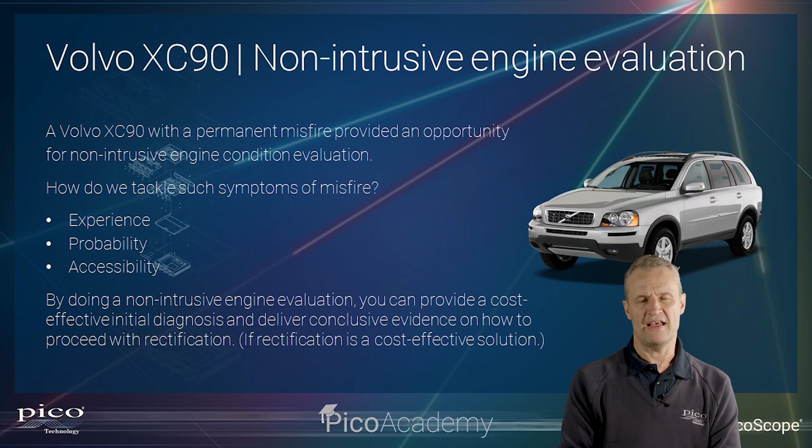So we have to check the condition of the 12-volt battery. We want to spin this engine to carry out a relative compression test. And you'll see here in these test results, on this occasion, the battery failed. So before we even start, we've got a repair bill of at least £100+ to replace the battery. Now, that may or may not influence the customer's decision, and as we go on, we'll see why.

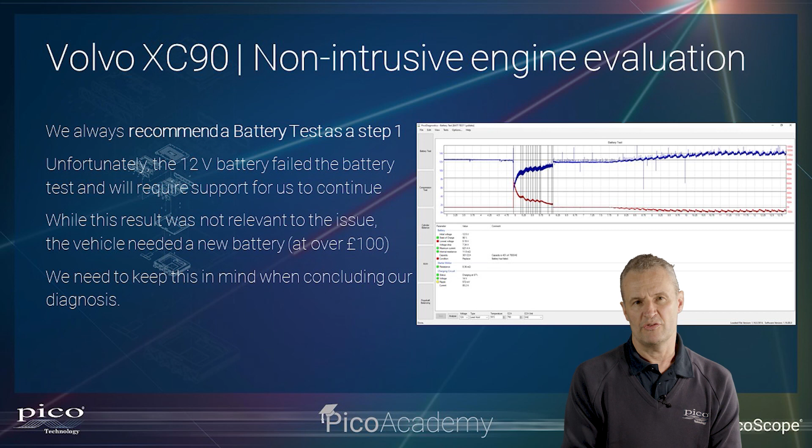Think about, let's say, if it's a spark plug that's the cause of the misfire - that's fairly straightforward, and I think a customer would probably go for that and a new battery. But however, when it comes to an engine that requires dismantling, all the labour that's involved there, plus another £100 for a battery, it all starts to pile up. It's the fact that we can hand all this information back to the customer without any nasty surprises at the end of a repair or during the repair process.

So in the data here, we can see that our battery has failed on capacity. The capacity entered was 750 cold cranking amps, and we achieved 40% of that. So in this scenario, we're going to have to support this battery to continue with a relative compression test.

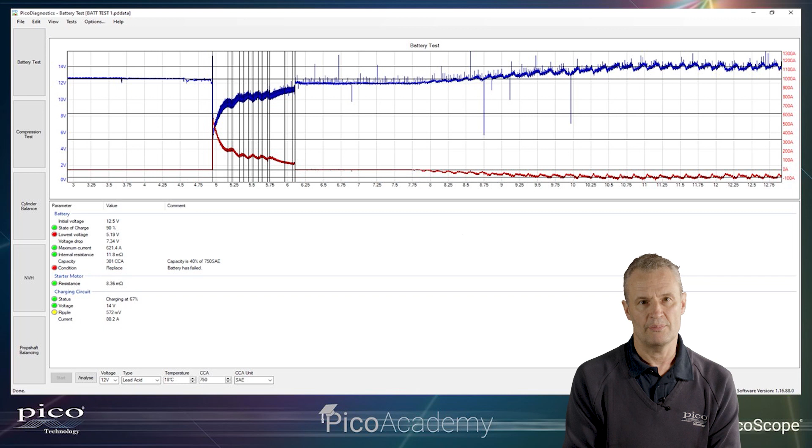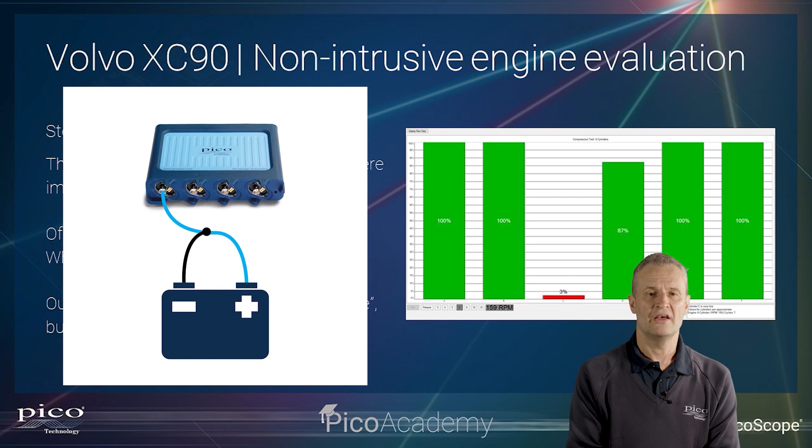And here we are. This is possibly the most straightforward test that we have in the Pico Diagnostics suite, probably PicoScope as well, for that matter. It's no more than connecting a test lead across the battery connected to channel A, disconnecting or preventing the engine from starting, cranking the engine with a foot on the gas pedal, so the gas pedal is right down, throttle is wide open, and these results speak for themselves.

Let's just have a look there. We've got a cylinder down. Clearly, it looks like we have no compression at all on one cylinder. Remember, it's a relative compression test, so we're comparing the worst performing cylinder with the best performing cylinder.

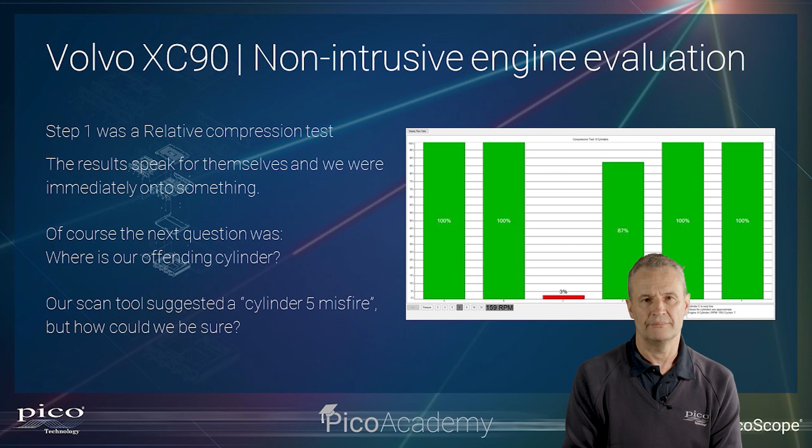Now, we found a cylinder that's down, but how do we know it's cylinder 5? It's at this point that we have to switch to PicoScope, and that's what we do here. So for this test, we incorporate a synchronization signal. What is that? Well, you'll see here on channel A, we've got battery voltage. On channel B, we've got battery current.

And on channel C, we've got the ignition event, what we call the PCM trigger signal, to the ignition coil pack cylinder 1. Now, we can also use the coil on plug probe as well - it's whichever is easier. I certainly like using the PCM trigger signal because we have a hands-free signal there. We don't have to hold the coil on plug probe or tape it in position. We've got a good connection.

Right, based on the firing order, which on this was a 6-cylinder, it's 1-5-3-6-2-4. We're going to have a look at, well, see if we can confirm if cylinder 5 is our offender. So let's have a closer look.

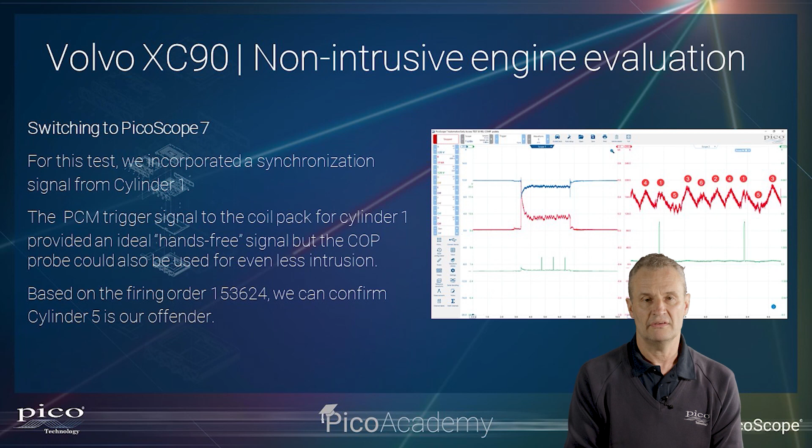So here on the left is the zoomed out or the full image, and on the right hand side, we have zoomed in and we have hidden channel A. So what we've got now is channel B against channel C. Now look at the alignment on channel C - it aligns with a peak that we know is a compression peak. It's a high current ramp from cylinder 1.

Following the firing order, look what happens to current flow into the starter motor as we go on to the next cylinder, cylinder 5, completely low. We then get a recovery back onto 3, so we know 3 is okay. Looking at 6, it's lower, but still much higher than 5.

2 and 4 are pretty much the same. 1 looks like it's slightly lower, but as we drop down onto the next cylinder, our current drops down considerably. Cylinder 5 is definitely our offender.

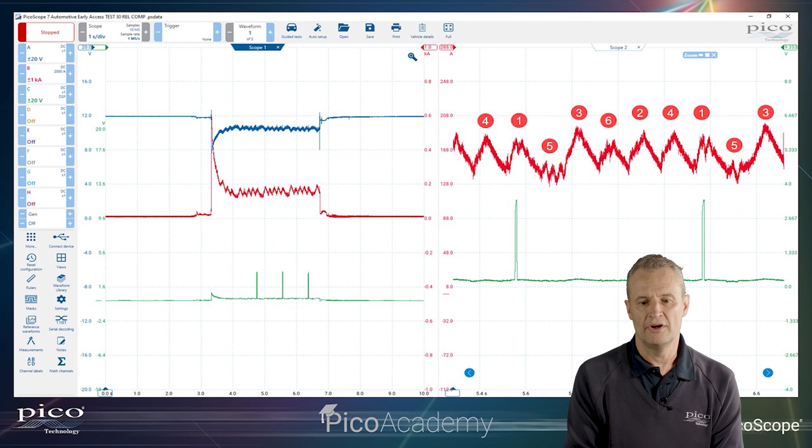What this is telling us is that the effort on the starter motor is minimal to compress cylinder 5, for whatever reason that may be. That's represented here by low current flow during cylinder 5's compression stroke. So let's move on.

We'll stay with the non-intrusive engine evaluation theme, keeping everything as non-intrusive as possible. Here we're going to look at exhaust gas pulsations. This is a real neat test where we place either the pressure transducer or a first look sensor into the exhaust tailpipe. Remember to secure it, because we don't want any pulsations that we can attribute to movement.

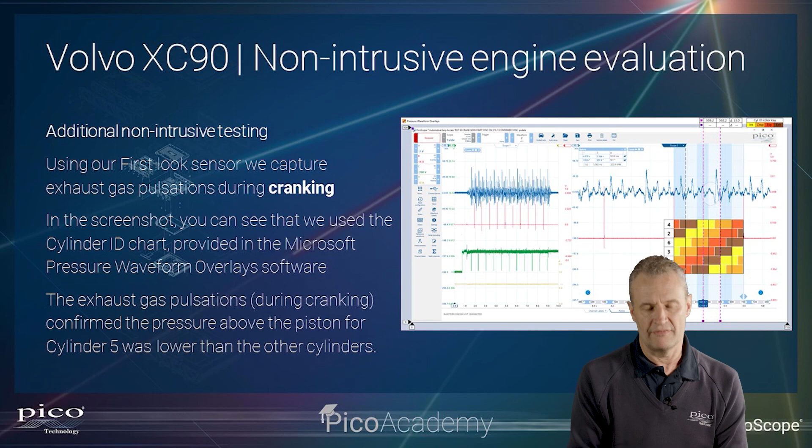What an overlay chart does is enable us to determine what events are taking place in the 4-stroke cycle on every cylinder, at any given point in time within our graph. So let's have a look.

Once again, on the left we've got the zoomed out view, and on the right we are zoomed in. We've kept our synchronization signal, this is channel B, and this is the red waveform. We know that that is the firing event for cylinder 1.

Moving up the chart, the next firing event in the firing order is cylinder 5, and that's what we want to focus on here. So I've added two magenta vertical lines, which are part of the pressure waveform overlay software, and we can see the exhaust stroke for cylinder 5 between the two magenta dotted lines.

Focus on the pulsations we can see in the exhaust — I've highlighted the area of interest with a blue circle. We can see there that we have an additional pull. This is a push or a pull back into the exhaust when cylinder 5 is on its exhaust stroke.

They call this the dollar bill test, where you traditionally place a dollar bill against the tailpipe of a vehicle, and when there was a misfire, momentarily it would pull the dollar bill back and seal the tailpipe. So why is that happening? Why is there a suction in the exhaust during the exhaust stroke of cylinder 5?

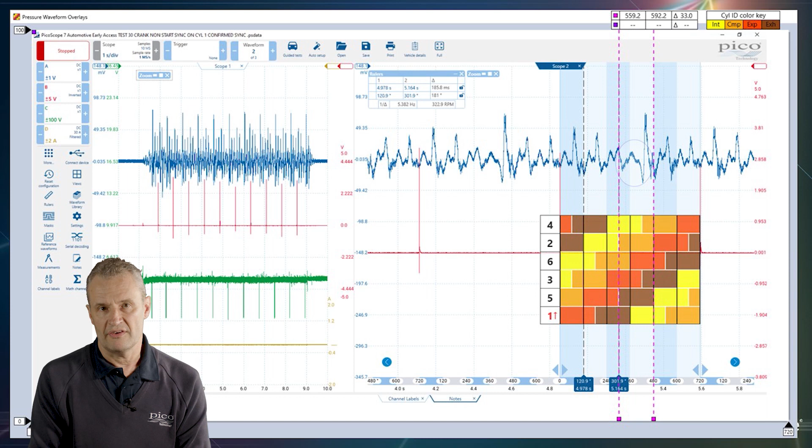Okay, so let's move on. We're gathering evidence as we go. We know we've got cylinder 5 compression down, and we know that when cylinder 5 opens its exhaust valve, there is a negative pressure above the piston. So what else can we add?

Well, let's keep going with non-intrusive testing using the pressure transducer. In this scenario we've used a pressure transducer in the intake manifold. This time we have combustion, because we want to pull a negative pressure inside the manifold, and the best way to do that is with the engine running at idle speed. So our engine is running with our misfire, of course. Everything is still connected, but we are tapped into the intake manifold with a pressure transducer, and because we can, we'll also leave the first look sensor in the exhaust system.

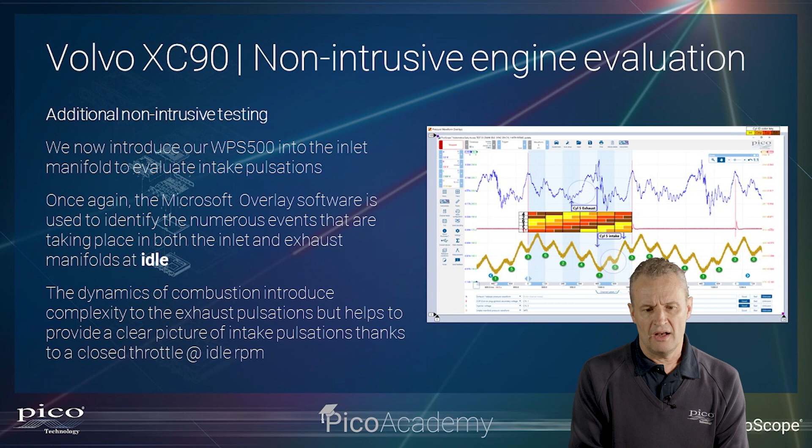Again, we'll add the pressure overlay waveform chart so we can determine what's going on at any given time. Let's focus on channel D here. Look what happens during every intake pull.

So this is every suction event inside the intake manifold when the inlet valve opens for each cylinder. Staying with the overlay chart, let's focus on cylinder 5, and our intake is denoted with the colour yellow. Cylinder 5 I've identified with the two arrows that point downward, and during the intake stroke of cylinder 5 we can see we have less of a pull on the intake manifold. Less negative pressure appears inside the intake manifold during the intake stroke of cylinder 5. Again, I've highlighted that with this blue circle.

Also take a look at channel A, which is the exhaust gas pulsations, and how they have changed by comparison to what we saw previously, because now we have combustion. Not only do we have combustion, we have the complexities of a misfire inside the exhaust system that generates all kinds of buffeting, all kinds of dynamics that it's really difficult to determine what is happening at any given time.

But with that said, focus on cylinder 5 exhaust event in the overlay chart, which is denoted with a brown colour. And the circle that I've highlighted there shows how we've had disruption in the exhaust gas pulsations during the exhaust event of cylinder 5.

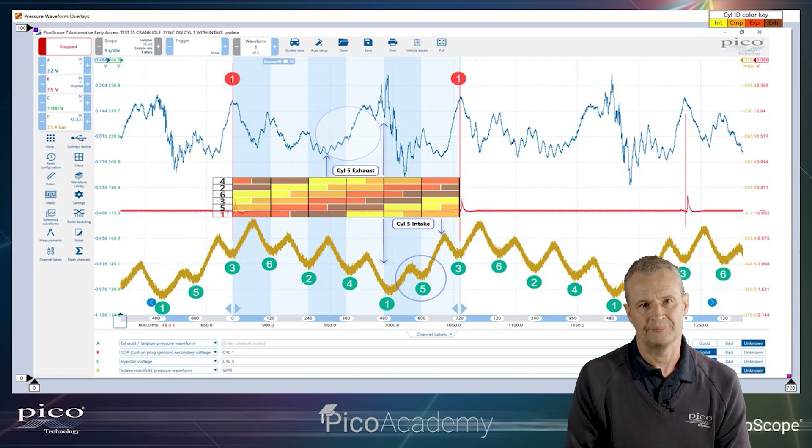Okay, so now it's time to become intrusive. And really, when you think about it, this is the most intrusive test so far. Up to now, it was relative compression, it was a battery test, it was a pressure transducer into the exhaust, and again in the intake, so no more than perhaps fetching an engine cover off and maybe disturbing a hose. But now we'll actually measure cylinder pressure. And for this, we use the pressure transducer.

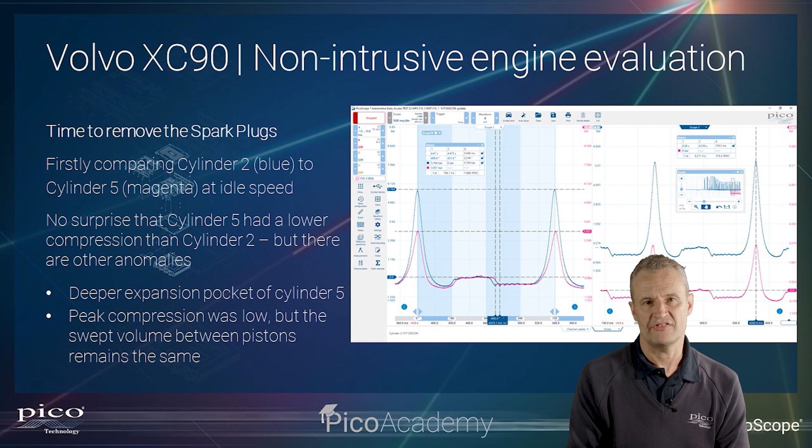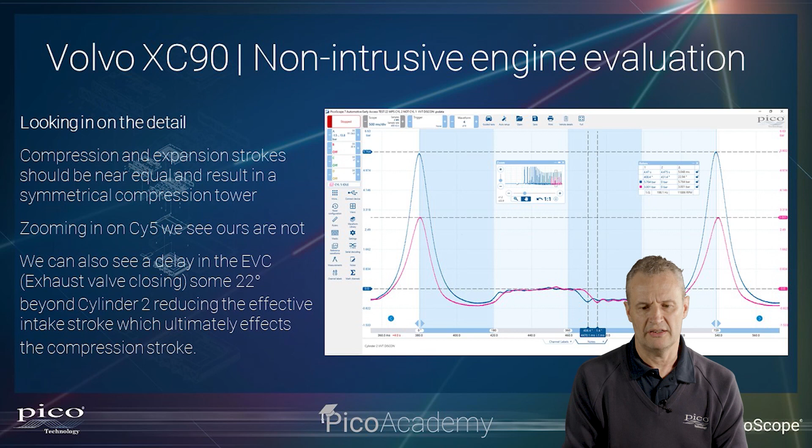We'll compare cylinder 2 in blue against cylinder 5 in the magenta, the pink colour. There's a couple of things to note here. I will just read them from here, but we'll also then go on to the next screen where we can analyse much further. It's very easy to see that cylinder 5 compression, the pink, the magenta waveform, is too low by comparison. We also have a deeper expansion pocket on cylinder 5, which I'll come to. We also have to consider the swept volume. Let us go on to the next waveform so I can actually analyse this with much more detail.

So starting with in-cylinder analysis, let's have a look at the waveform within PicoScope 7. It's clear to see, isn't it, straight away that cylinder 2, the blue waveform, is much higher for peak compression than cylinder 5, the pink waveform. What we are interested in initially is peak pressures, that they are even. So across every peak pressure event, we want to see that the peaks all align. Any sort of deviation from peak pressure suggests that we may have poorly seated valves.

Don't be too alarmed by the fact that compression is down at 5 bar for the good cylinder. Remember, this vehicle is idling, so we are at about 800 RPM, but the throttle is closed, which means the engine is starved of air. So if we can't pull air in, we can't compress, hence we have low compression.

Moving along to symmetry, the compression towers, look at the magenta one here. Notice how the rising pressure, in terms of the distance between the peak, the rising pressure and the zero phase ruler on the rising section compared to the falling section, is much wider. The distance between here up to zero and then from zero to, let's say, around about 40 degrees, something like that, is different. That gives us a leaning compression tower. A leaning compression tower is an indication of cylinder leakage.

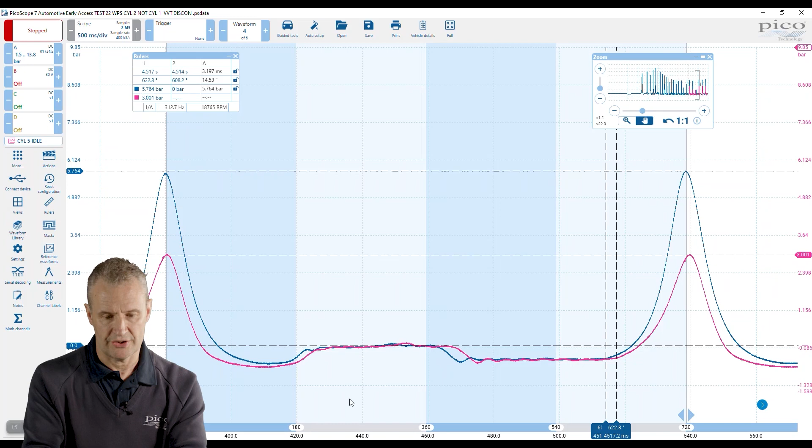So finally, let's just go back to the PowerPoint and summarize in our last slide our next step.

But for example, if this is direct petrol injection, you've got all that to contend with. It may be that some of the VVT control is disturbed as a result of simply taking the camshaft cover off. We know faithfully, based on all our diagnosis here, that that is a worthy process. It is based on conclusive diagnosis that we've captured and stored and saved and can present. And it's probably at this point where the customer will decide, okay, this vehicle, it's really not worth pursuing any further. Or it could be that this is a worthy repair.

And of course, if taking the camshaft cover off doesn't reveal anything, then next move we move on to the cylinder head. My gut feeling on this one, because of that delayed exhaust valve open and close event, and the difference between the effective intake and compression stroke, I would most certainly be looking at camshaft followers, camshaft profile, hydraulic lifters, anything that is controlling valve gear. I think that's a worthy check, along with oil pressure as well. Remember, if this is hydraulic lifters, then oil pressure comes into play too.